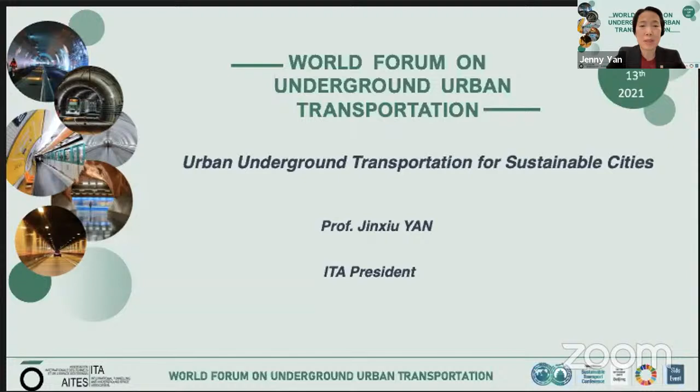So I'm going to talk about what ITA is and the challenges of big cities, urban underground transport solutions, the role of metro systems in sustainable cities, and the way forward.

So what is ITA? ITA is a global organization that supports the development of tunnels and underground space through knowledge sharing, technical advancement, and ethical business practice. It was founded in 1974, and it's a non-profit and non-governmental organization.

It has 78 member nations, and in 1987, ITA as an NGO achieved special consultative status with the Economic and Social Council of the United Nations. ITA has actively participated in or organized UN activities.

So ITA has 4+1 committees, including ITA committees on new technologies, on underground space, on education and training, on operational safety of underground facilities, as well as a young tunnel member group.

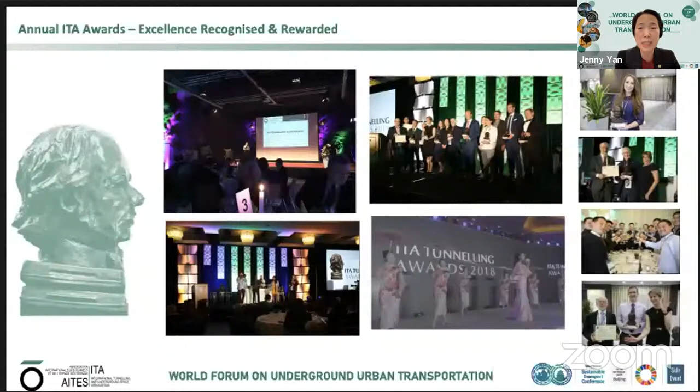ITA has successfully organized 6 ITA Awards events, and the 7th edition will be held in November this year virtually due to the pandemic. The purpose of ITA Awards is to recognize and reward outstanding projects and new technologies worldwide.

Training and education is one of our key tasks. We organize different training courses, and at the same time, we work together with universities. ITA issues new publications each year, including guidelines and reports, which promote knowledge sharing and technical advancement.

ITA's goal is sharing knowledge and promoting technical advancement and ethical business practice worldwide. We have organized 46 World Tunnel Congresses and numerous seminars and workshops. We promote new technologies through ITA awards, guidelines, and reports from working groups and committees. We have organized 81 sessions of training courses in 28 countries, and provided master's degree scholarships for students in developing countries. We address the healthy development of the industry and fair risk sharing.

Regarding urban underground transport solutions, big cities are now facing challenges such as land shortage, pollution, traffic congestion, and parking difficulties. The use of underground space provides solutions to these challenges, including underground transport facilities, underground public facilities, and other underground facilities.

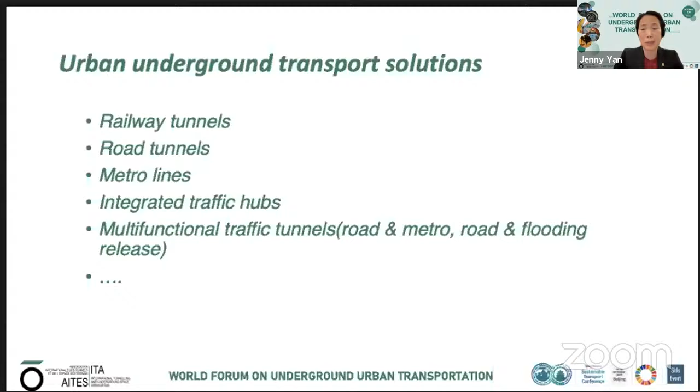I would like to share with you a typical urban railway tunnel project: an intercity railway linking Changsha, the capital city of Hunan province, with Xiangtan and Zhuzhou, two other cities. In Changsha city, the railway is mainly underground, consisting of two long tunnels.

One tunnel is nearly 14 kilometers long with 5 stations, and the other is more than 12 kilometers long with 4 stations. Three of these stations are transfer stations to metro lines. The underground solution has avoided dividing the city into two halves, and reduced noise and vibration on the ground.

The Alaskan Way Tunnel in the US and Madrid M30 motorway in Spain are typical urban road tunnel projects, not only improving traffic conditions in the city center but also greatly improving the environment on the ground. Randy from the US and Pedro from Spain will share with you the details of these two very interesting projects later.

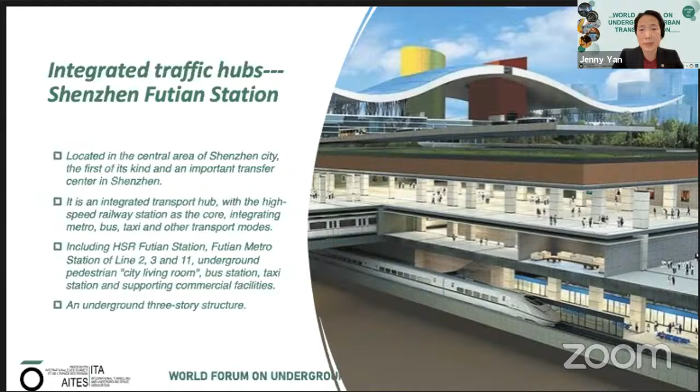Dr. Zhou Mingliang from China will share with you a similar project in Shenzhen later. In terms of the role of metro systems in sustainable cities,

around 170 cities in 55 countries have urban rail transit lines. Currently, around 30 countries are building or extending their lines. Some countries are building several lines in several cities at the same time. Intensive construction is ongoing in Australia, Canada, China, France, India, Italy, and other countries.

One of the major metro projects ongoing is Grand Paris. There are 4 lines, 200 kilometers, and 68 new stations.

China has built a lot of urban rail transit lines over the past decades. By the end of 2020, 7,655 kilometers were built in 45 cities, of which 84% are underground.

This slide shows the different kinds of urban rail transit systems in operation in China. You can see the majority, 48%, are underground metro.

This slide shows the operating mileage of metro lines in each city in China. Shanghai, Beijing, Chengdu, and Guangzhou are the top cities with the longest operating mileage of metro lines. Shanghai reaches almost 800 kilometers, Beijing more than 700 kilometers, and Chengdu and Guangzhou more than 500 kilometers.

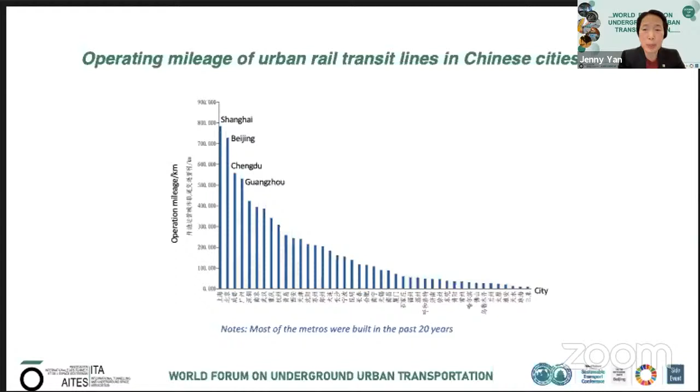It's very interesting that shared bikes are playing an important role in the last kilometer of metro connections. You just scan it with your mobile phone and you can ride it to wherever you like. It's very convenient and very green.

The most popular and efficient use of underground space for big cities, I think, is metro systems, which improve urban transport greatly. More metro systems have become the backbone of urban transport in many big cities. It has a large transport capacity. It's fast, punctual, safe, and environmentally friendly. It contributes to sustainable and resilient cities.

Metro systems contribute to several UN SDGs, as Olivier mentioned at the beginning, including number 3, number 7, number 8, 9, 11, 12, and 13. And it contributes to building inclusive and sustainable cities.

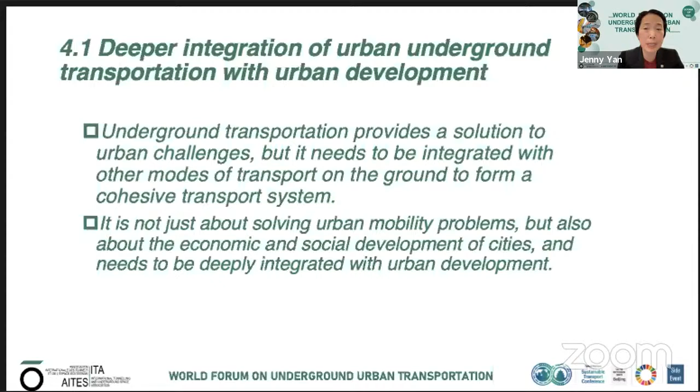The way forward: I think it's important to integrate deeply urban underground transportation with urban developments. Underground transportation provides a solution to urban challenges, but it needs to be integrated with other modes of transport on the ground to form a cohesive transport system. It is also important that it's not just about solving urban mobility problems, but also about the economic and social development of cities, and needs to be deeply integrated with urban development.

Not only land on ground level, but also underground space is very limited and needs to be used very efficiently. So how can we use underground space more efficiently? We may use a single tunnel instead of twin tunnels. We may use 2 or even 3 levels in a tunnel instead of 1 level. We may use precise tunnel shapes to avoid wasting space. We may use a multifunctional tunnel to increase underground space utilization, etc., like the different projects like Smart Tunnel and other projects. So we can use underground space more efficiently.

Urban underground transportation provides environmentally friendly solutions to cities. But at the same time, construction methods of such projects should also be environmentally friendly, and further countermeasures should be taken, such as less disturbance to the environment, less noise, less vibration, and less dust, and protection of underground resources, treatment and use of excavating spoil, and use of clean energy for both construction and operation, etc. I'm convinced that urban underground transportation will play an increasingly important role in sustainable cities. Thank you.

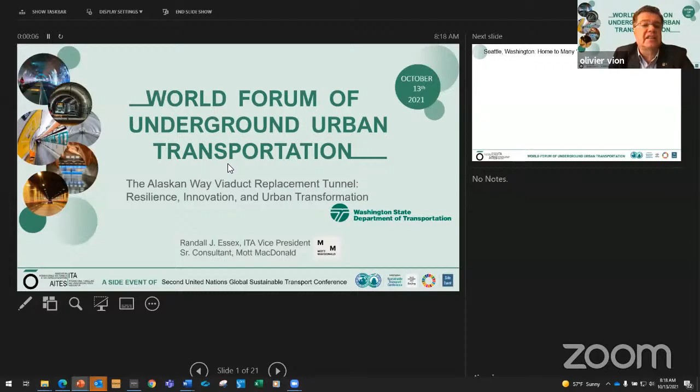It is my pleasure and honor to present a remarkable project developed and carried forward by Washington State DOT. It's 5 o'clock in the morning their time. They were kind enough to allow me to give this presentation, which I've worked on since 2006. The Alaskan Way Viaduct replacement tunnel, I think, captures three fundamental elements that have been discussed just earlier here: resilience, innovation, and most certainly urban transformation.

Seattle is the home to many firsts: big airplanes, a couple of companies you might have heard of, the Bill and Melinda Gates Foundation, maybe even a beverage company you've heard of, all hosted and based in Seattle. We're also home to the world's largest soft ground tunnel, the Mount Baker Ridge Tunnel, and the largest SEM excavations ever carried out in North and South America at the Beacon Hill Transit Station. This project involved, at the time, the world's largest tunnel boring machine.

But the story really begins in 1989 in Oakland, California, during the Loma Prieta earthquake, a Richter of 6.9. It was a terrible issue. I was living in the Oakland Hills at the time. The World Series baseball was going on, and thankfully Oakland was playing San Francisco across the bay, and many people were already home from work watching the baseball when the earthquake struck at about 5:30 in the evening.

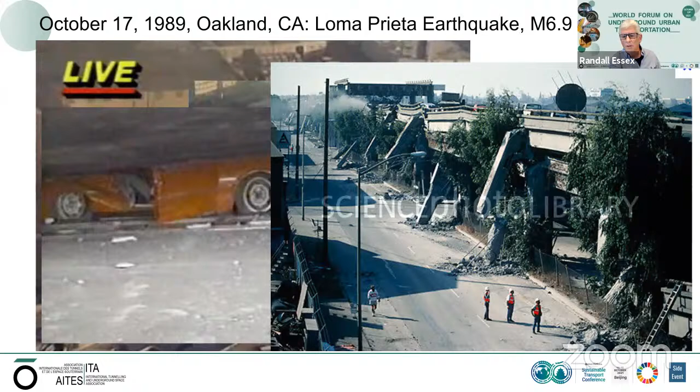This used to be a double-decker freeway. It collapsed. The Cypress freeway collapsed, crushing a number of vehicles, causing a lot of damage. Flying buttress supports failed terribly, came crashing down and pancaked - that's the upper deck sitting on the lower deck. It was egregious. It was somber. And as I say, I lived up in the Oakland Hills and we rode out the earthquake, my wife, my son and I. That next morning I saw the aftermath firsthand, and it was devastating.

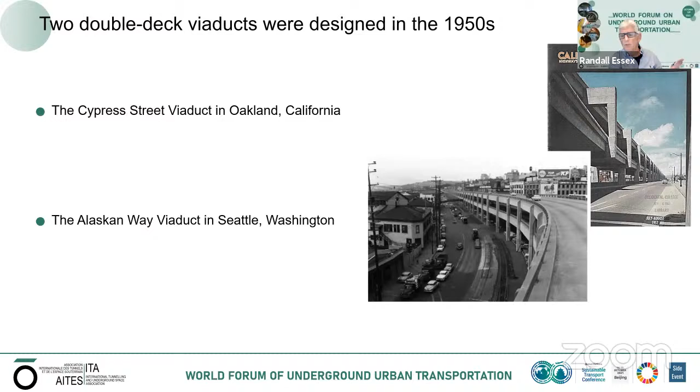Remarkably, only 63 people lost their lives because the baseball was going on at the time. There were two double-deck viaducts that were engineered and built in the 1950s. One was the Cypress Freeway Viaduct that I've just described in Oakland, California. The other was the Alaskan Way Viaduct in Seattle, Washington. They may have shared ideas in design, but what they also shared was a similar deficiency: upper columns and connections that were unable to resist severe lateral deformations in the earthquake magnitudes that struck California and then ultimately struck downtown Seattle.

Well, this is a picture of Seattle's central waterfront. Since the 1900s, traffic relief has been a problem in the congested area. After decades of design and debate going back and forth, a solution was decided upon: two grade separated or elevated highways, one that would pass along an interstate route, Interstate 5, farther inland, and the other, Alaskan Way Viaduct, would carry State Road 99 along the waterfront.

Both projects were a couplet. They were intended to provide traffic from south to north and north to south without encumbering the city streets, and they were both built in the 50s.

Well, Seattle got their Loma Prieta in 2001. It was called the Nisqually earthquake. It was a 6.8, not a 6.9, but devastating nonetheless. A subduction zone earthquake. It damaged viaduct columns and connections.

It caused the settlement of some of the foundations of the viaduct. They discovered voids in the 1930s seawall that was securing the waterfront area. They determined the seawall was susceptible to liquefaction and settlement in any subsequent event.

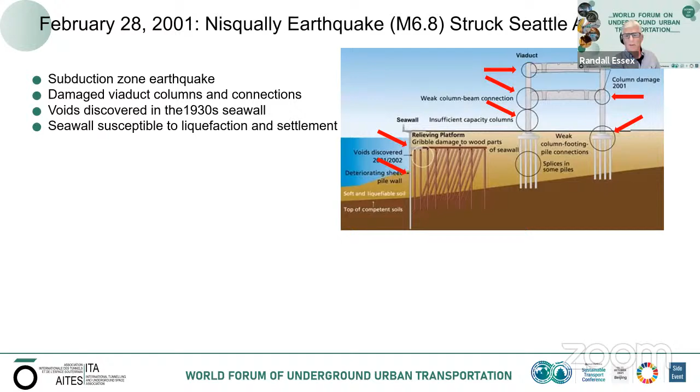Emergency repairs were carried out immediately to strengthen these supports. I call it the reframing of the expression full metal jacket, to provide steel reinforcement so that if aftershocks or subsequent earthquakes were to occur, what beset the Cypress Freeway in Oakland would not repeat itself in downtown Seattle.

Well, the timeline of this project was after the Nisqually earthquake. There was lots of debate, lots of discussion, lots of interchange with the public about what to do. Do we repair? Do we replace? Do we bore a tunnel? Some even felt no build was an acceptable solution.

Well, thankfully, the governor of Washington State in 2009 declared no more study. We need to move ahead. We're going to select the tunnel option and it's going to go forward.

From 2006 to 2010, I was part of a team that prepared RFPs and issued design, build, delivery. I'll tell you that a key member of our team was a veteran from the Smart Tunnel project in Kuala Lumpur. So we brought a lot of lessons learned from that project to this one. Carrying lessons learned forward is a very important aspect of our business.

And this was critical here because no one had ever built a tunnel like Smart, and no one had ever built a tunnel like the Alaskan Way Viaduct Replacement Tunnel.

Well, in 2010, Seattle Tunnel Partners contractor was selected, a joint venture of two contractors I'll describe later. They selected Hitachi Zosen to build an earth pressure balance machine of a dimension never seen before, upwards of 2 meters larger diameter than the largest machine ever built before, in Shanghai - 30% more face area. It's not just diameter, it's face area. It has to do with torque, balance of the cutter - a lot of technical issues had to be overcome.

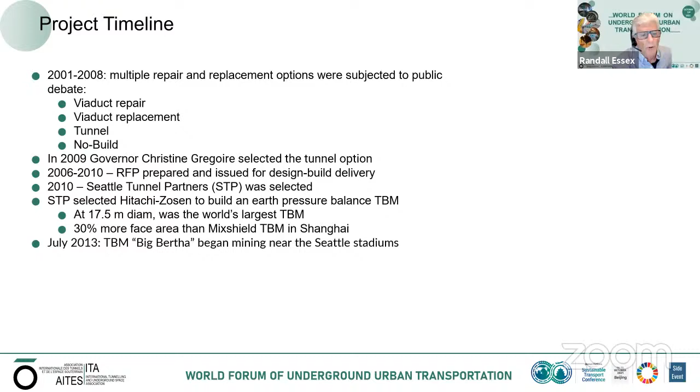And they were definitely in a new space and needed innovation every step of the way. The machine was termed Big Bertha after a former mayor in Seattle. In 2013, it began mining near the Seattle sports stadiums on the south and headed north to Seattle's Space Needle. April 2017, the TBM mined into a receiving pit, completing its drive.

In 2019, the viaduct closed to realign the highway configuration so they could connect into the new tunnel portals just constructed. In 2019, the tunnel was opened to vehicles. At that time, the viaduct was removed, and I'll show you pictures of the dramatic transformation of the waterfront. And then tolling began in November 2019.

Some tunnel facts: a 3.2 kilometer drive, a double deck tunnel. This is much larger than Smart. Smart accommodates cars only. This is the first bored TBM tunnel to accommodate double deck truck traffic, thus the need for the much larger diameter.

There's a view of the alignment and plan at the south cut and cover heading northward to the Space Needle. It was mined through glacial soils up to 67 meters of coverage, with 5.3 bars of hydrostatic pressure.

And for those highway engineers, here are some elements of details of the configuration: the lane width, the shoulders, the clearances, the grades, etc. The viaduct was able to accommodate at its maximum about 115,000 cars per day. This double deck tunnel came close - it has a capacity of 85,000 cars per day.

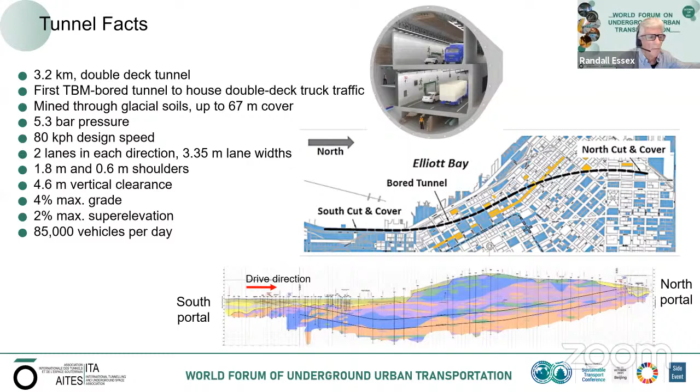Manufacturing the largest TBM in the world was no small task. It was manufactured and assembled in the port of Osaka, Japan, where they had some of the strongest lifting cranes in the world to help assemble the massive components.

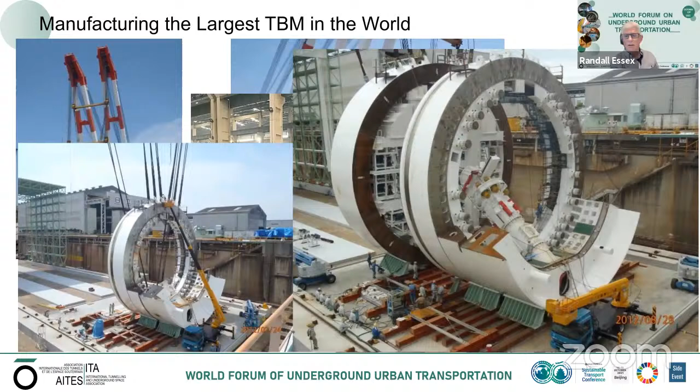That's a screw conveyor on a 17-meter machine, made with hardened steel. Here they are assembling pieces and erecting them at the docks for the first time. There's the screw conveyor going in and the rear shield. And finally, Big Bertha is ready to bore, but this is in Osaka, Japan.

The project is in Seattle. So the TBM was disassembled, shipped in various pieces on the world's largest cargo ships, and brought to Seattle, where it was reassembled on site.

You can see where the viaduct was removed to provide space for a launching pit. The TBM began its drive directly under the viaduct that would be removed upon completion of the tunnel construction.

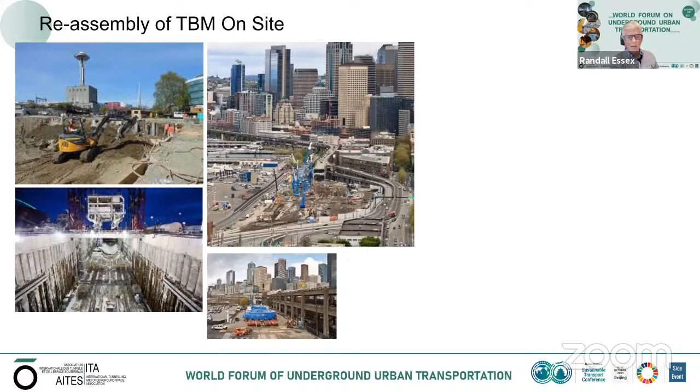Here they're preparing the site. Here's the launch pit or the launching slot. Here they're bringing pieces of the TBM in from the port. There's the trailing gear assembly. The cutter head is being offloaded.

And then they reassembled it in a pit where those blue cranes are shown in the photograph. Here's the cutter head being lowered into the pit. Here's the TBM and its trailing gear taking shape.

Engaging the public is a very important element. Seattle is only the 20th largest city in the US, but it's a very community-driven environment, with a lot of engagement, votes, and participation on behalf of the public, even to the point of allowing them access to the top of the TBM for children and members to write good wishes on the machine upon its launch. And here's the slot trench, and you can see how close it is to the port.

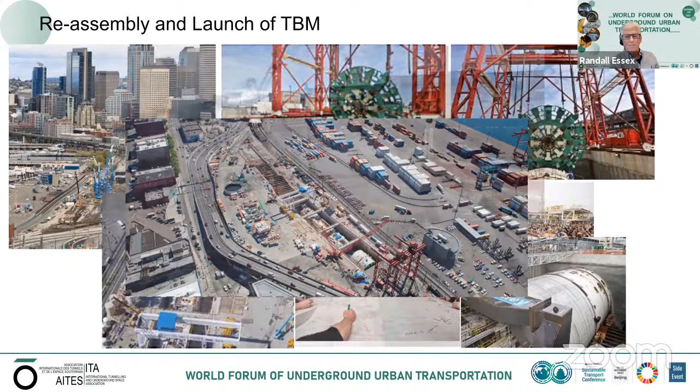And finally, TBM mining begins in 2013. So here's some photographs of some of the tunnel construction. What does a 17.5-meter opening look like?

Here's the south portal. There were two erector arms like this to install the precast concrete segments. They could operate concurrently, independently of one another. There's the bored tunnel.

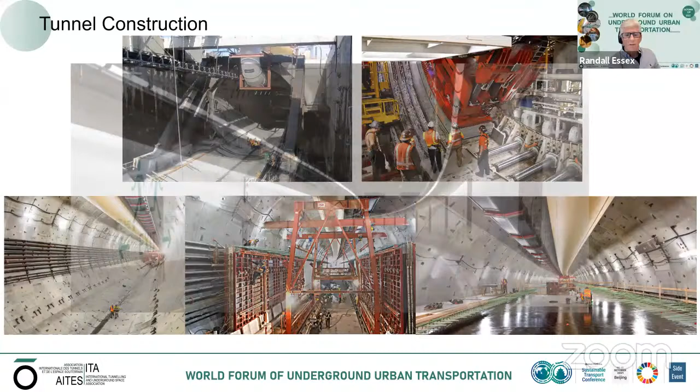Tunnel completed before the inner workings and fixations are installed, the walls, the supports to accommodate double-decker emergency egress passages in the sidewall openings. They're completing the upper deck lanes, and this is a photograph of the completed lower deck lanes just prior to opening for operation.

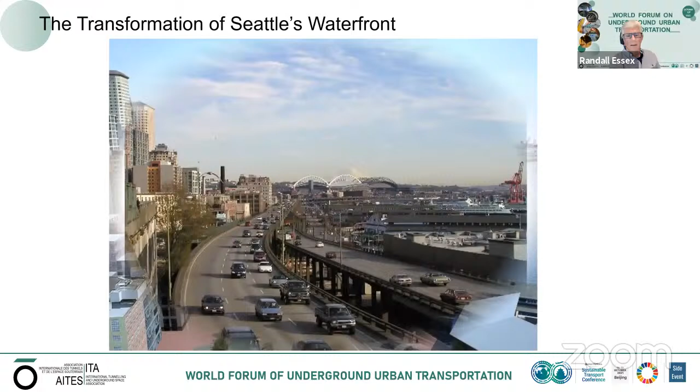It may be unmatched, I don't know, but we find it in the tunneling business. Once we do something unique, it becomes a precedent for others to follow. SMART was a precedent for engineering this project. There are many precedents. The Channel Tunnel was a precedent for subaqueous drive. I believe that this will be a precedent for urban renewal, leveraging the benefits of underground space and underground tunnel operation to transport people and goods and services.

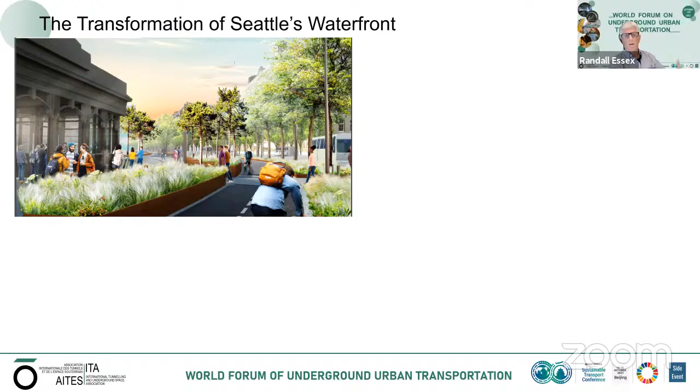Well, landscape architects were engaged and the competition was involved. Again, a lot of public engagement to talk about how they could modify this newly acquired acreage and turn it into living space and communal space for the public to enjoy.

We've solved the issue of providing resilient, sustainable transportation for people going through and under the city. Now, what about people who are inhabiting the city, who are working here, who are living here? These images will eventually be followed with real life construction to enhance the experience along the waterfront, the access to the harbor, and the access to new recreational facilities looking west to Puget Sound, all giving rise because of one large cylindrical opening underground.

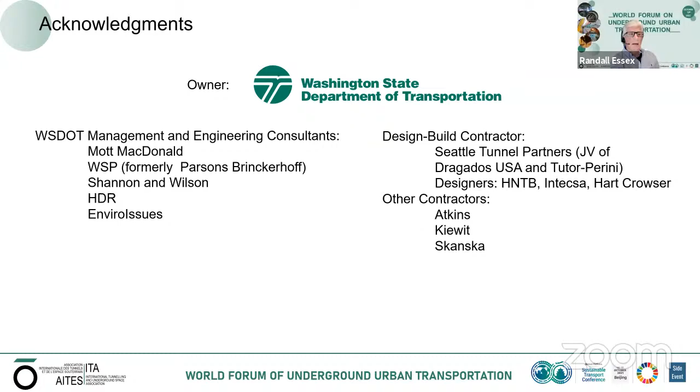In closing, I'd like to note that a lot of the key innovations and knowledge gained from this project were captured in the Alan Muir Wood lecture of 2018, presented by Professor Ed Cording, professor emeritus of civil engineering at University of Illinois. The title of Dr. Cording's report is 'Monitoring and Controlling Ground Behavior at the Source: Recent Applications in Pressurized Tunneling.' The diameter of this tunnel was such that the annular void was equivalent to the mass created by a 6-meter diameter TBM - that's how much void space had to be controlled. This and many other aspects gave rise to innovations in how to control ground when excavating at very large scales.

In closing, the Alaskan Way Viaduct Replacement Tunnel is truly an element of resilience. We now have a bored tunnel that will withstand much greater than a 6.8 earthquake - an innovation to create the largest tunnel boring machines ever attempted in the world, to create the largest highway tunnel of its kind. It's an urban transformation, turning a rusting double-deck viaduct reaching 75 years of age into the Champs-Élysées. Thank you for your attention.

Thanks a lot, Randy.

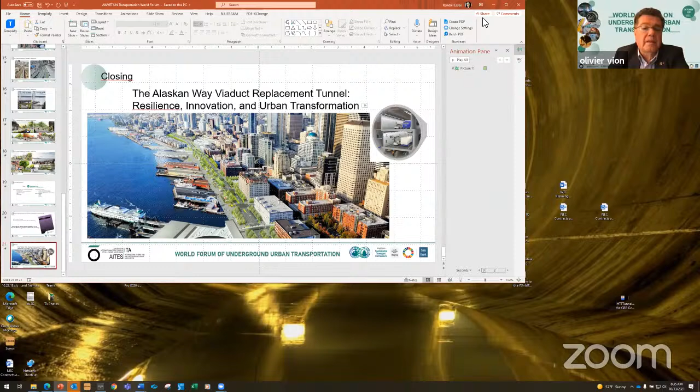We are now going to have, I would say, quite a similar urban transformation, but this one in Madrid with the construction of the M30.

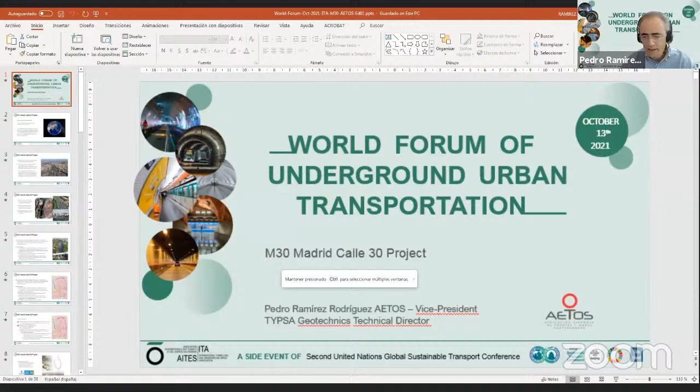Can you see my screen? No, we see your computer. Oh, totally, okay, sorry about it. Hold on. You see it now? Yes, okay, sorry for the delay, for the inconvenience.

Thank you, Olivier. Good morning from Madrid - good afternoon, good evening everyone. First, I would like to thank the ITA for the kind invitation to participate in this World Urban Transport Forum, in the framework of the Sustainable Transport Conference organized by the United Nations in Beijing. In this presentation, I will try to explain a project which takes nearly 20 years from its beginning, but which is a good example of a case study of how it is possible to improve transport and at the same time recover the surface for leisure use with the smart use of underground space.

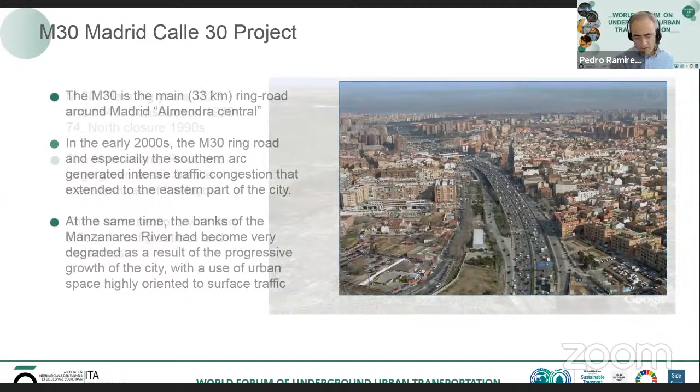The M30 is the main ring road around Madrid, called Almendra Central because of its shape. In the early part of the century, the M30 ring road, especially the southern section, generated intense traffic congestion that extended to the eastern part of the city. At the same time, the banks of the Manzanares River became very degraded as a result of the increasing traffic. The idea for that ring road started in 1929, and its construction was completed - the initial part at the end of the 1970s, with the final rings closed in the 1990s.

The Manzanares River and the large green areas to the west and east are the main features of the layout. You can see here some images of how the river banks appeared at that time.

The Madrid City Council decided at the beginning of the century to undertake a comprehensive reform of the entire perimeter ring road, not just the south area, but especially that area because it was very degraded. The main targets were improving the M30's functionality, reducing traffic, making it safer and more comfortable, reducing traffic inside the ring itself, eliminating the barrier effect because these roads created a barrier making one side not accessible from the other, and also improving the environmental condition of the area.

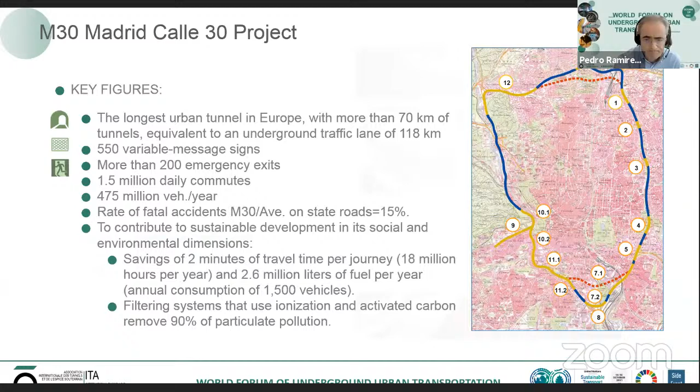This infrastructure is managed by a mixed public-private partnership where 80% of the shares are owned by the Madrid City Council and the rest 20% by a private company, called EMESA.

The main constraints of this project were the planning, design, tendering, and construction to be completed in an amazingly short time, only 4 years, trying to be safe with few references before, because that had never been done. However, the success of a recent metro enlargement in Madrid, with more than 150 kilometers completed in a very short time, created the idea that this could be feasible.

The challenge was then to try to do it quickly, safely, and cost effectively, considering the advantage of global benefits in the long term.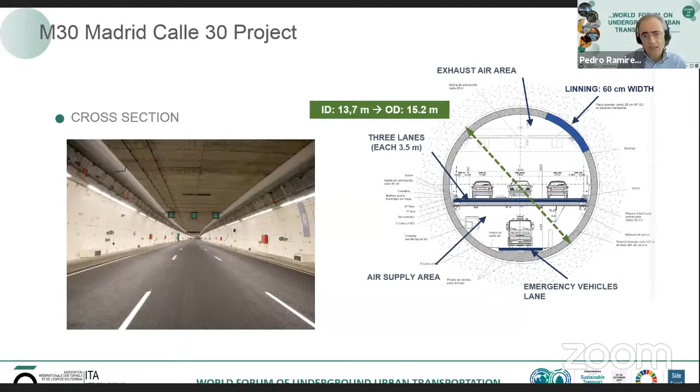This is obviously significantly smaller than the Bertha that Randy has explained, but we have to consider we are talking about nearly 7 years before.

Also, this project was completed with galleries according to regulations in terms of safety, and any other big underground infrastructure like the ventilation shaft to deal with the air.

The alignment is similar to the Alaskan, a bit longer, with a cover of about 60 to 70 meters to the axis of the tunnel, crossing the tertiary deposit with quaternary on top.

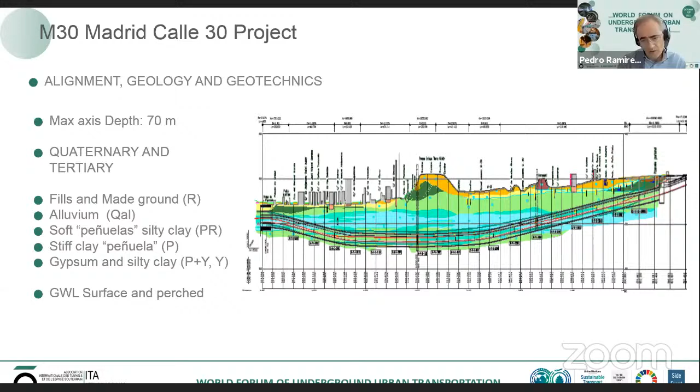For the completion of this project, 2 TBMs were manufactured. At those days it was a world record with more than 15 meters diameter, manufactured in a very short time, one by Mitsubishi and this one by Herrenknecht.

Just an idea of how quickly this type of action can be performed: it could be completed at nearly 800 meters per month, meaning it would be possible to complete 4.2 kilometers in just 7 months.

Another point to underline is that for these mined tunnels, it is necessary to prepare launching shafts for the assembling of the TBM at the entrance and exits.

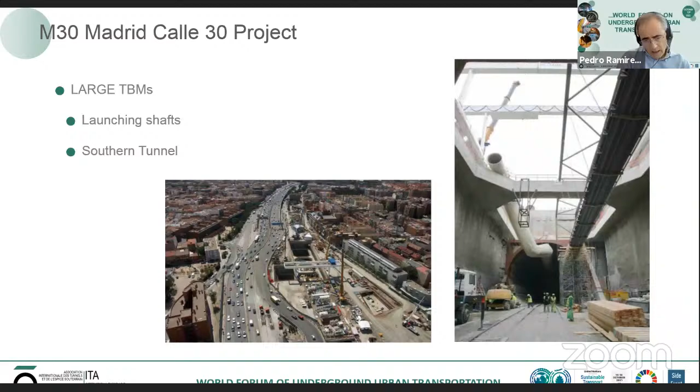You can see here how, with this massive diameter, it's like a mobile industry moving up to between 30 to 40 meters per day.

Another issue to consider in any urban project is how to deal with the potential effect on existing infrastructure, buildings, and any other structures.

In this example, you can see how it is possible to analyze this with many instruments and tools that are in our hands now.

In this case, for example, being so narrow, the space between the twin tunnels and this building to be protected was analyzed, with slab and grouting used to protect it.

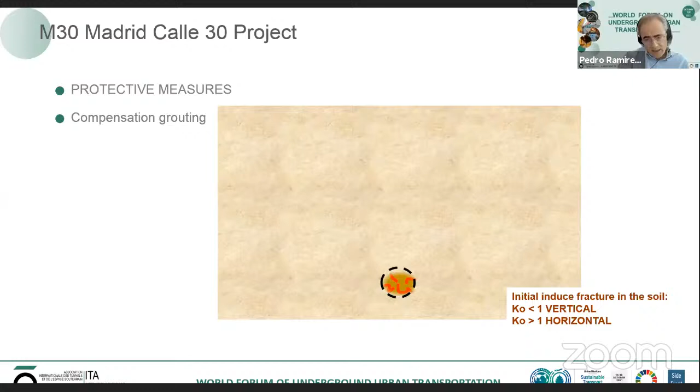Just very quickly, this technique has been very useful in Madrid because of the nature of the soils being overstressed, like in London for example. This is not feasible everywhere, but by using compensation grouting, which was tested in Madrid with very good results, it could be

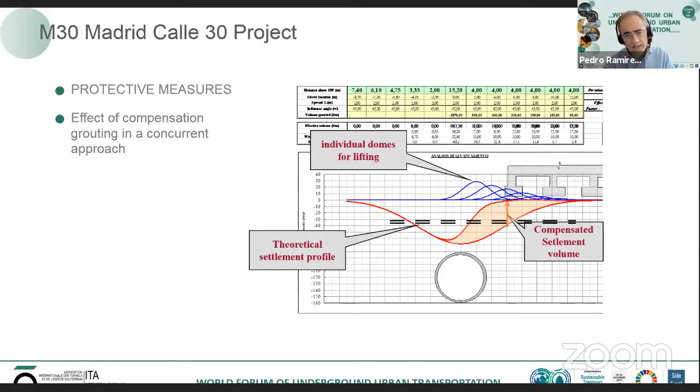feasible to act concurrently to control the subsidence created by these tunnels and to mitigate the risks to the surrounding structures.

Any other issue to consider in any urban tunnel is the control in terms of installing devices and references for monitoring, to continuously check how our predictions compare to reality.

There is another part of this project, not just the underground tunnel, but the cut and cover section, which is more dramatic in terms of impact during that time. But it was considered worthy to concentrate all the work in the shortest time possible, in order to complete and put it into service in the minimum time possible.

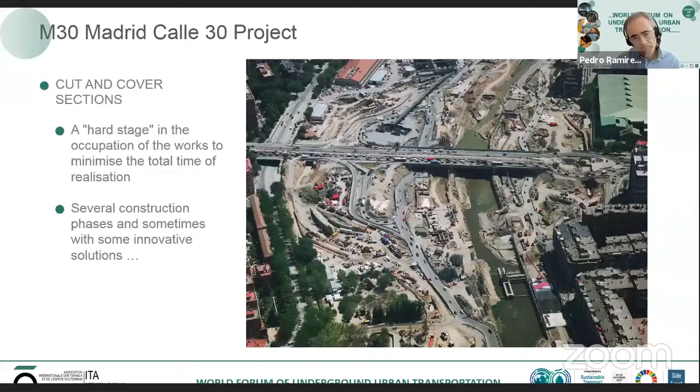This is an example of other innovative solutions that were performed. For instance, to deal with an existing very old tunnel, jacks, micropiles and treatment were used to create the current situation, which is how it appears nowadays.

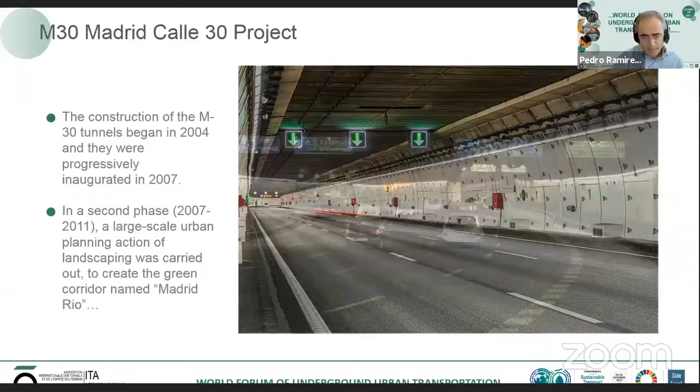At the end of 2007, the infrastructure was completed and put into service. But another issue in mind for the owner was how to improve the environmental and sustainable condition of those margins, and put in the second phase. So in total we're talking about roughly 8 years, a big project to improve the conditions once the tunnels were covered underneath.

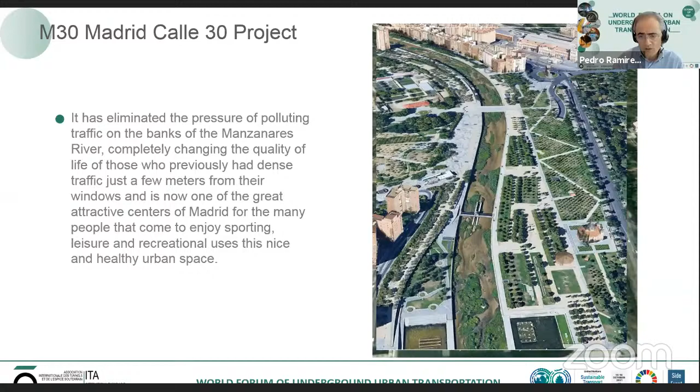This is the aspect it has nowadays. This project has been recognized for its benefits, the reduction of contamination, and creating a nice landscape, converting the area into one of the most interesting touristic places to visit.

For the future, to summarize, something similar is planned in the north: to cover the very old railway, which is the second in importance in Madrid. The idea is to cover it, not exactly underground since it's at grade, but to create another underground space on top for environmental benefits and uses for the people.

So the lessons learned: the tunnel, with all the resources and experience, made it possible to upgrade urban roads where they had become inefficient. Large scale construction can be carried out in a relatively short period of time, depending on conditions and many other issues. This type of finance, public-private partnership, could be maybe the only way in Europe, or at least as far as we know, to make this feasible in terms of economics and finance.

The smart use of underground space, as Jenny said at the beginning, and the overall cost of all these structures should be analyzed considering all the benefits, not just the direct ones, but also in a global manner.

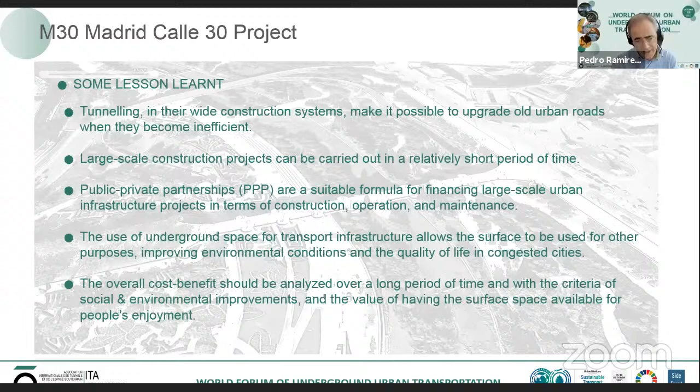It's very difficult for me to summarize all the people involved in this, but I want to mention that it was like a miracle because everyone was perfectly coordinated and motivated, and it was feasible to make this a reality. Thank you for your attention.

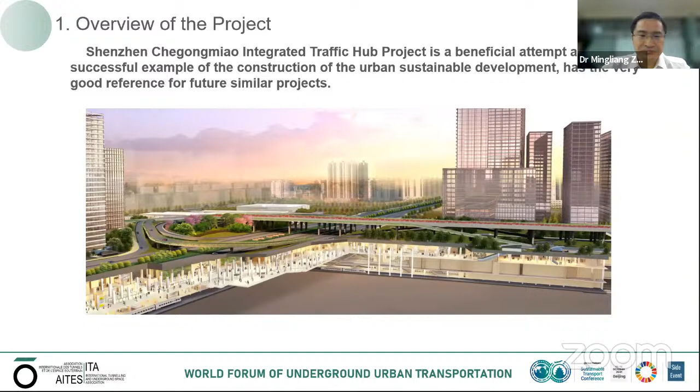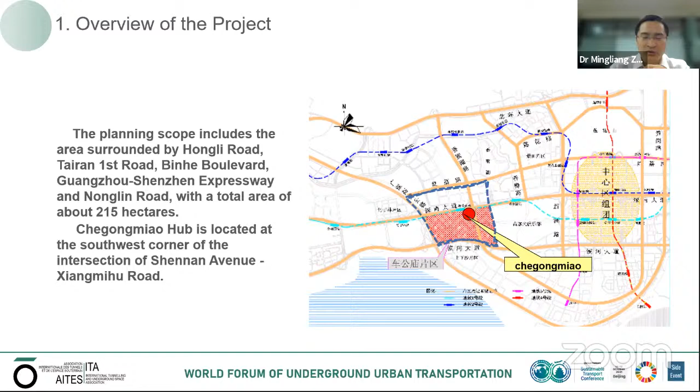Here is detailed information about this area, Shenzhen Chegongmiao area. It's located at the southwest corner of the intersection of Shennan Avenue and Xiangmihu Road. Here, two big avenues - the width of Shennan Avenue is 80 meters. It's not easy to connect to the plots on both sides.

The traffic function of Xiangmihu Road was mixed, and the traffic volume of urban trunk roads in the area was large. Here are the figures in the map. Divided by urban trunk roads, the connection was not easy, and the turn-left function is mixed.

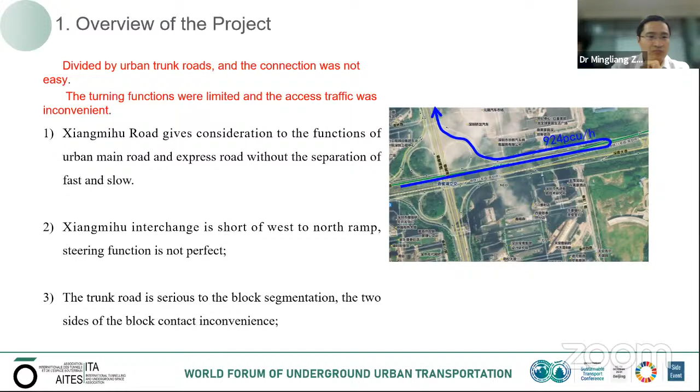Second part, we analyze the demand for this area's development. After detailed analysis, we think we must resolve four aspects for this area. One is transportation, must be convenient, and second is transfer, must be convenient for the passengers. The third one is about function integration, and the last one is for the environment, must be comfortable.

General idea 2 is about the project's aims. We want to achieve the transfer organization with reasonable layout and a smooth streamline. Here we divided two different layers. The pipelined transfer organization is adopted, and the second one is to ensure the convenience of transfer for major passenger flow. This figure shows the route for passengers to transfer from one part to another.

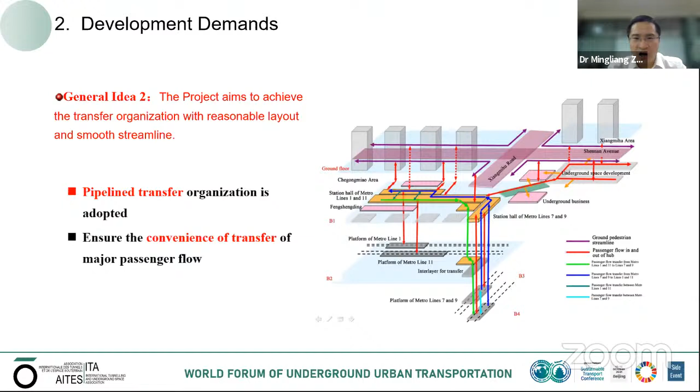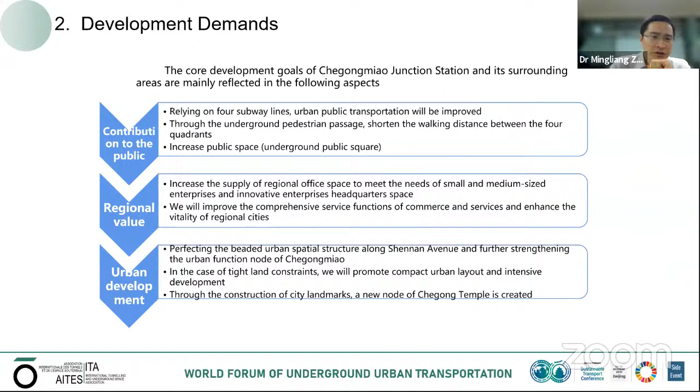The core development goals of Chegongmiao Junction Station and its surrounding area are mainly reflected in the following aspects: one is contribute to the public, the second one is regional value, and the third one is urban development.

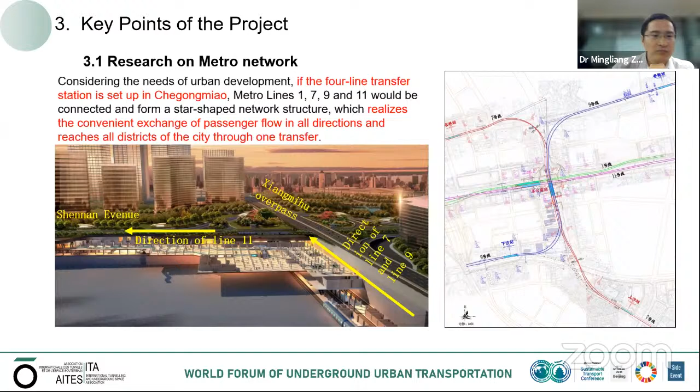The second part is about research on the road traffic system. For Chegongmiao area, before we constructed the metro system, the road traffic was mixed, and we want to improve the traffic in all directions in this area.

The transformation goals of Xiangmihu interchange are to improve the stream function, and the Chegongmiao interchange is to achieve faster connection.

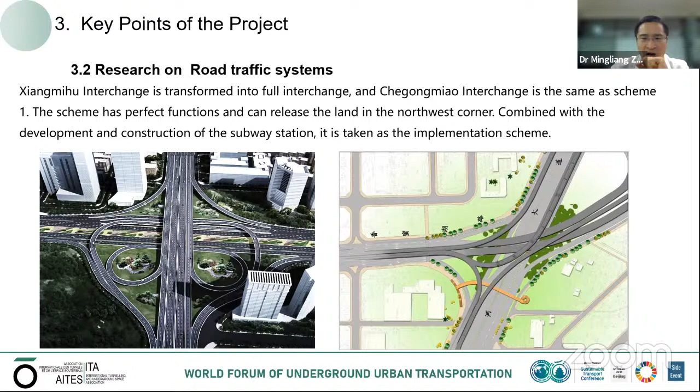We must also consider walking to form a clear and convenient ground traffic flow system and internal traffic system. In the picture, we show that people can go to another side through our new part. Here is shown the old one and the new one we changed, especially in the left part - we changed the Chegongmiao area.

The third one is about the intensive use of space. It has 5 floors underground and 52 floors above ground, with a floor area of 150,000 square meters. The second floor underground is part of the station hall, which can be directly reached from the building. Underground floors 3 to 5 are for parking garage.

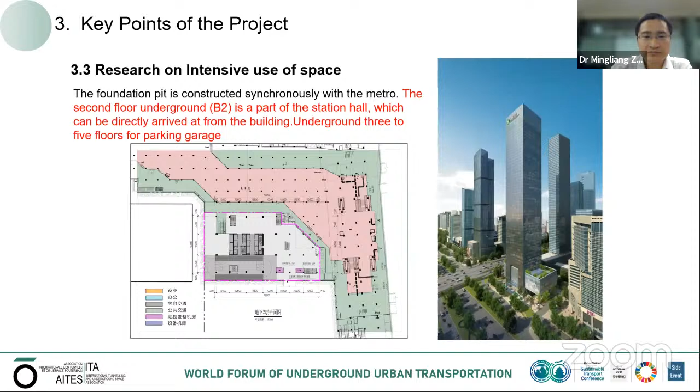With the planning and reconstruction of the Westland, we stress the connected underground space. In these two pictures, we can show the different functions for this area - for commercial, for the museum, for education and schools, and for residents - different functions, different parts.

The space under the bridge is developed, and the commercial space of the station is integrated, connected with the surrounding plots through the underground street passage. Here we make full use of the space under the bridge.

It's connected with surrounding buildings also, and underground pedestrian passages extending in all directions are formed. After we finish this project, people in this area can go from one side to another side, in all directions they can walk, they can reach different parts.

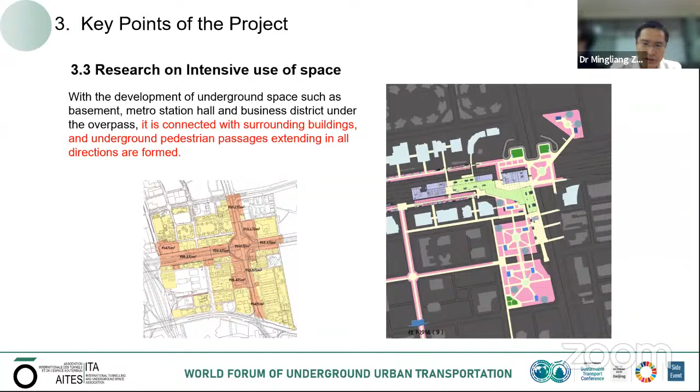For the last part is the benefits and achievement for this project.

The second is about economic benefit. Because we made full use of the space for the land released by road reconstruction, we built a complex with an area of about 150,000 square meters, integrating business, office, hotel, rail transit, and parking, which created an economic value of about RMB 15 billion and maximized the economic benefits of this project.

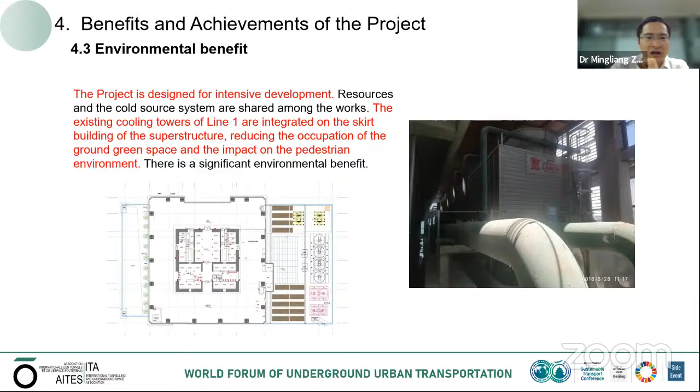The third part is about environmental benefit. We also considered the environment of this area. This project is designed for intensive development. The existing cooling tower of Line 1 is integrated into the skirt building of the superstructure, reducing the occupation of ground green space and the impact on the pedestrian environment. This is a significant environmental benefit.

And the social benefit: with the opening of the project, the traffic in this area has been greatly improved. For the older city, we think with the new function of this part, the reconstruction in Tairan area on the south side consists of 760,000 square meters of construction works, including 50,000 square meters of underground space.

After we finish this project, we conclude that we think this experience can be used in many parts, including Shenzhen, and other areas including 3- or 4-line hubs. We think if we build public transit with this mode, the life of people in the city will get better and better.

Tarcisio? We don't hear you. Hello? You are not muted, but we don't hear you. And we don't see you. Now we see you, but... Can you hear me now, Olivier? Yes, I hear you now. Okay.

I'm glad to have the chance of sharing with you this experience about the benefits of a metro system on the population health in São Paulo. An outline of my presentation: I will bring some quantitative assessment of air pollution decrease due to the metro network in São Paulo, the beneficial consequences in terms of health and numbers about lives saved, and finally some quantitative comparison of underground and elevated solutions for metro. I'm glad I was able to put together some numbers for this presentation, which address exactly goal number 3, as Olivier said in the introduction, United Nations goal number 3 on sustainable development for better health and life for all ages.

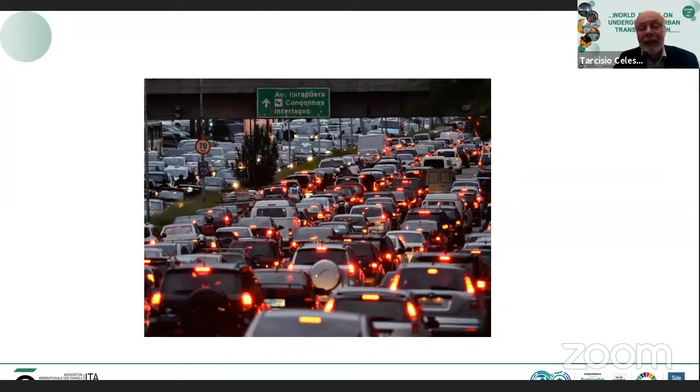In this research, they were able to measure the influence of the metro with very accurate methods, which I will not go through in my presentation, on the day when the metro was on strike. So instead of people moving by metro, people would have to move by cars and so on.

So the concentration of PM10 in the atmosphere increased to 101. In this research, they were careful enough to take similar days, so that the day when there was the strike was compared with another day of similar temperature, similar relative humidity, similar wind speed, and so on.

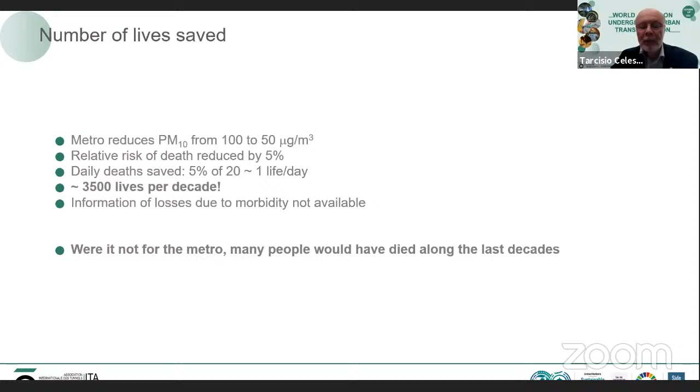I don't bring information here on losses due to morbidity, but Professor Saldiva also works on that. So as a general statement, we could say that were it not for the metro, many people would have died along these last decades in São Paulo. Some people are here because of the metro system. I don't know if I am here because of that, but some people would have died. So these are real numbers which show very clearly what underground transportation infrastructure can do for United Nations goal number 3.

Quantitative benefits of São Paulo Metro, summarized in their yearly report, show that the metro system nowadays saves more than 400 million liters of fuel consumption, with consequences for greenhouse gas emissions. It's not only the money saved, but a lot of good consequences.

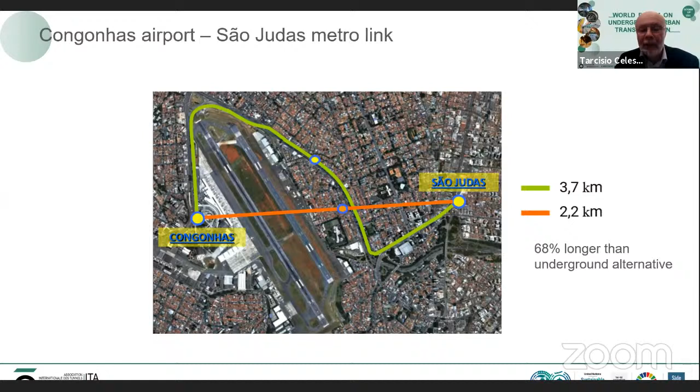Let's see, with numbers again, the consequences of this. The length: 3.7 kilometers elevated, 2.2 kilometers underground, so 1.5 kilometers more with the elevated solution. This link was predicted to serve 16,000 passengers per day with a headway of 2 minutes between trains, so the total number of daily trips would be 1,140. Additional travel distance, elevated minus underground, would be 1,710 kilometers per day, or 624,000 kilometers per year.

And let's think about the consequences of this additional travel distance. It means more than 15 turns around the world. Can we think of how much it costs to put a train going 15 times around the world every year, in terms of energy, operational costs, additional carbon footprints, rolling stock, and so on? Not to talk about the passengers, which would spend 400,000 man-hours in addition due to the extra distance, and not to talk about noise and visual impact of the elevated alternative with respect to the underground alternative.

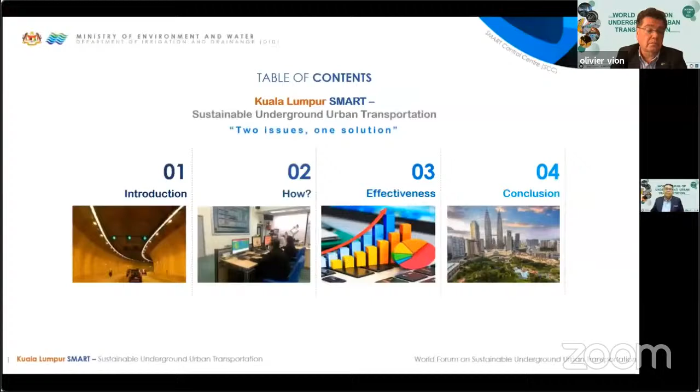Before we go further, I think it's best for us to know about the Smart Tunnel itself. As a country which receives around 3,000 millimeters of rain each year, flood is one of the main issues that Kuala Lumpur needs to face every year, and the frequency of flood events is increasing each year. Besides that, Kuala Lumpur is also getting busier.

Each year is good for prosperity, but Kuala Lumpur is getting more and more congested. Something needs to be done to ease the situation.

Initially, the idea of having the Smart Tunnel was to build a stormwater tunnel to divert water from upstream and bypass Kuala Lumpur. However, our previous Prime Minister suggested that we include more purposes for the tunnel to bring more value to it, so that's when we had the road tunnel included.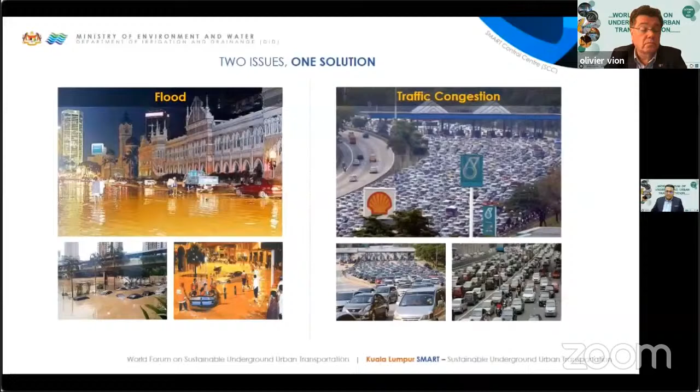So as you can see here, basically SMART is short for Stormwater Management and Road Tunnel. And as we all know, this tunnel serves two purposes: one is to mitigate flood, and the other is to relieve traffic congestion.

Since we have this dual purpose function, the construction of SMART involved two different ministries, the Ministry of Natural Resources and Environment, and the Ministry of Works. Both ministries worked hand in hand via two departments and agencies: the Department of Irrigation and Drainage, and the Malaysian Highway Authority.

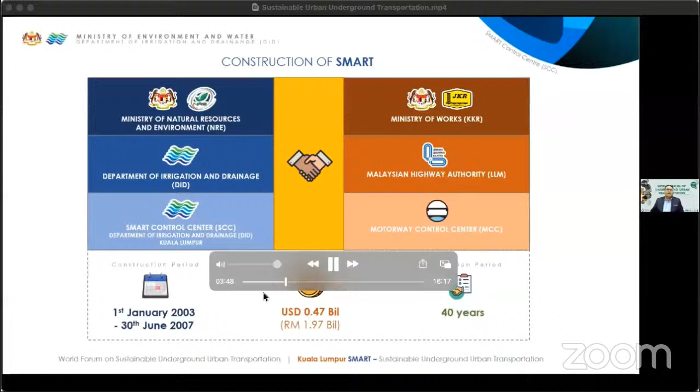So with completion of the tunnel on the 30th of June 2007, to serve this dual function, we have two offices: the Smart Control Center, which is under the Department of Irrigation and Drainage, and the Motorway Control Center, a private entity which controls traffic for the road tunnel.

As you can see in the slides, the tunnel diameter is actually 12.8, so we can say the tunnel diameter is 12 meters, and it is the largest in Southeast Asia and second largest in Asia.

So this is the road tunnel cross section, whereby you can see the upper deck and lower deck, and also the drainage component down there. The length of this tunnel is 3 kilometers.

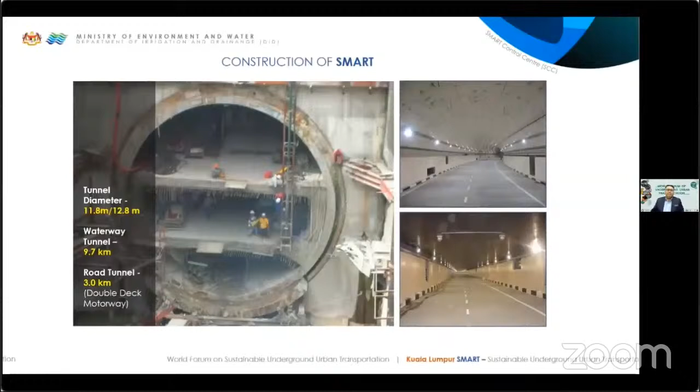I just want to share with you a glimpse of a tunnel segment and also the proof grouting processes that were done during the construction period.

So we are talking about sustainability, and the main ingredient in sustainability is effectiveness. I will try to share with you how we are doing it.

We have two operational modes, based on the water flow from Sungai Ampang and upstream of Sungai Klang. If it is below 70 cubic meters, we do not activate any modes at that time, so the tunnel is not operating and the traffic in the road tunnel operates as usual. But when the water flow reaches more than 70 cubic meters...

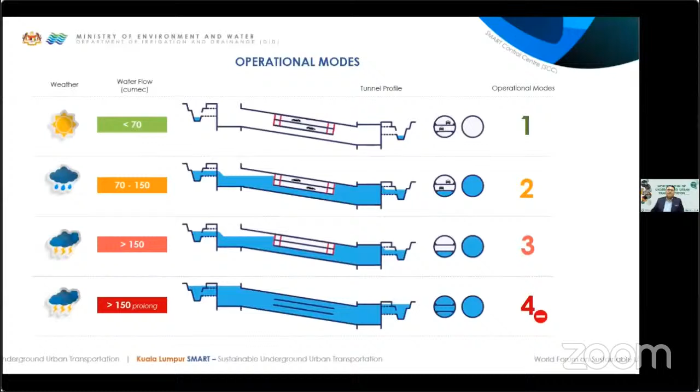So to make it easier for us to understand more from the operation of these modes, I also prepared some videos to show how the operation, the modes, is being operated. So let's have a view of this, please.

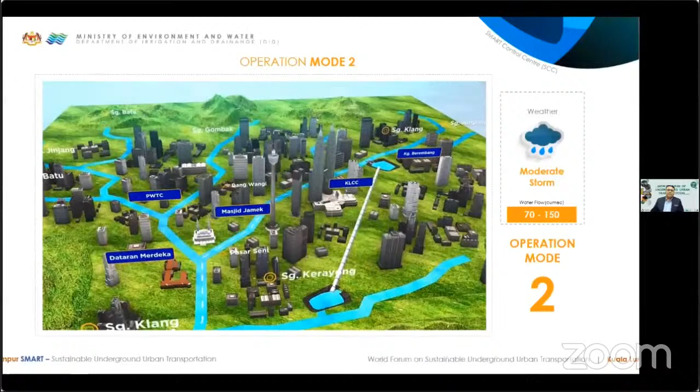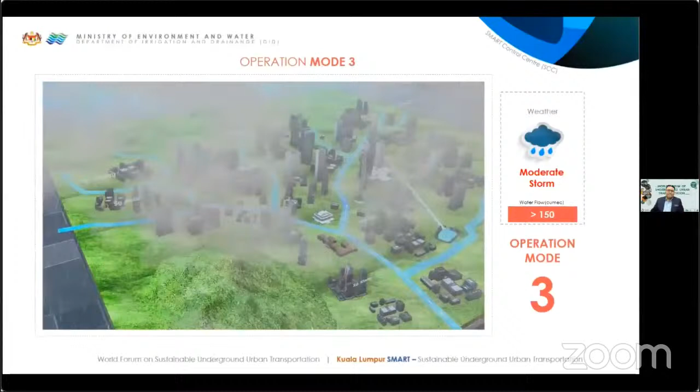So this is for the first mode, and then mode 2. Mode 2 is actually utilized for reducing the flood risk for Kuala Lumpur. So for mode 3, when we start evacuating the road tunnel. And finally, mode 4.

Now we are going to talk about the effectiveness of the implementation of all of these modes. So looking at the operation mode, I just want to share with you the trend. So if you can see in the slides, the rainfall trend in Kuala Lumpur, since we are receiving 3,000 millimeters per year. So if you can see the trend there, it looks alike with our monthly operation mode. So we can understand basically when most of our modes need to be operated.

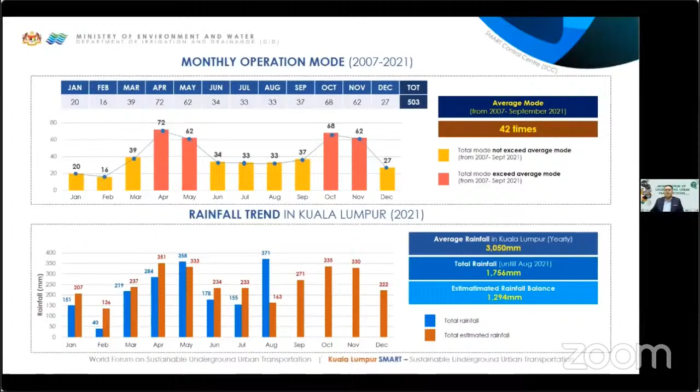So we try our best to optimize the traffic usage in the road tunnel. So basically, by having this type of operation, we can see that the road tunnel is actually being closed only several times within these 14 years. So basically, if you look into this slide, it shows that from 503 modes that we already activated, only 114 were for mode 3 and mode 4. This is actually when the road tunnel actually needs to be evacuated.

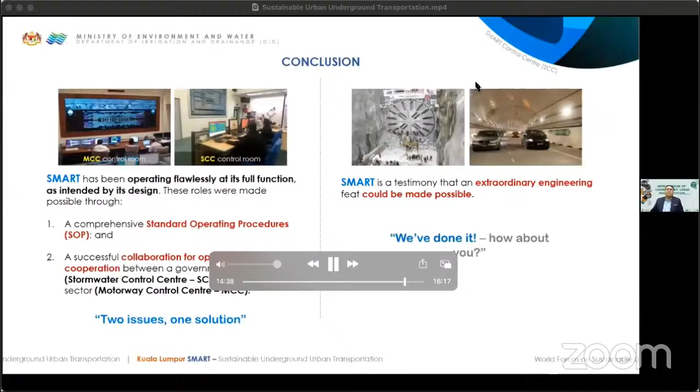So as a conclusion, SMART has been operating flawlessly at its full function, as intended by its design. So these roles are made possible through a comprehensive standard operating procedure and also a successful collaboration for operation between government agency, which is us in Stormwater Control Center, SCC, and also Motorway Control Center, which is run by a private entity. And within these 14 years of operation, I believe that SMART is a testimony that extraordinary engineering could be made possible.

We've done it. How about you?

So with that conclusion, I believe I have to end my presentation. But before that, this is actually...